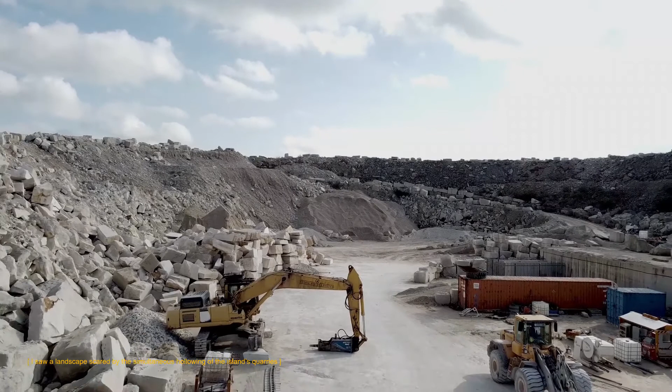On my visit to the Isle of Portland, I saw a landscape scarred by the simultaneous hollowing of the island's quarries and the layering of its offcuts. The scale of Portland's material absence is not comprehensible by the immediacy of the land around it, but only by way of recounting the limestone structures saturating the City of London.

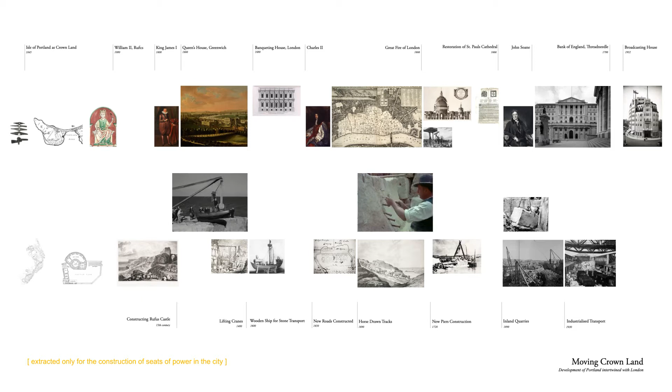Displaced for over 400 years, the island is one of the UK's largest sources of construction limestone, but the decline of solid limestone construction has replaced stone masonry with cement and cladding production that today accounts for more than 90% of the island's output. As a royal manor, the moving of royal land historically symbolized a transfer of authority, extracted only for the construction of seats of power in the city, governing religious, financial, and development priorities.

In the last century, the shift from sea-based to land-based transportation incentivized the pulverization of limestone into cement, requiring the grinding of 2 tons of limestone for every ton of cement, while breakages from the slicing of large dimension stone into thin, lightweight cladding produced 90% wastage during fabrication.

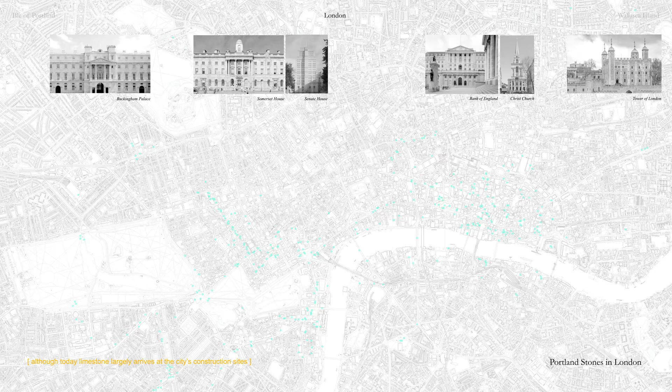Quarrying, the act of scoring natural stones, extracts terrains into unfinished cities, giving cities the illusion that Earth does not exist. This is a map of the square miles of remaining Portland stone buildings, although today limestone largely arrives at the city's construction sites in the form of concrete mixes.

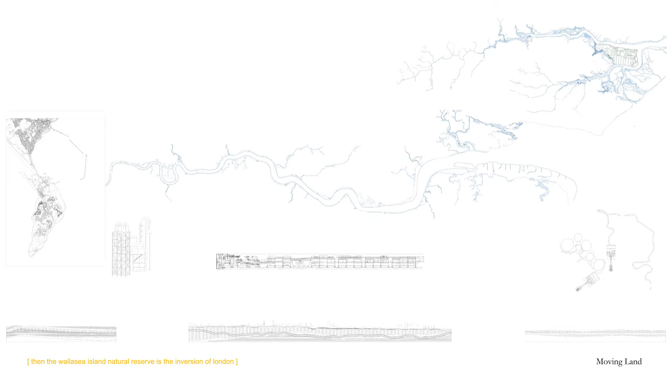If London is the inversion of Portland, then the Wallasea Island Natural Reserve is the inversion of London. The 269-hectare island, nested in the River Crouch Delta near the coast of Essex, is a reparation zone built to undo the destruction of urban construction.

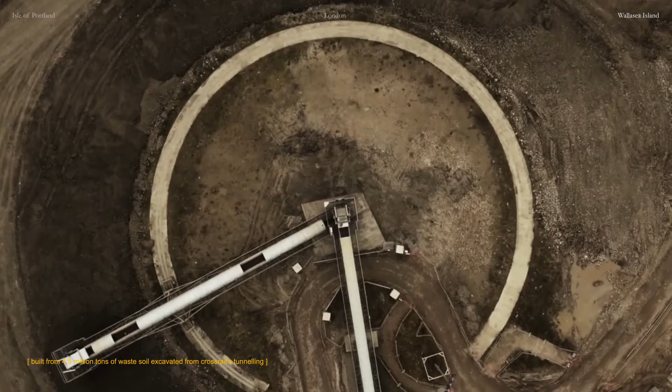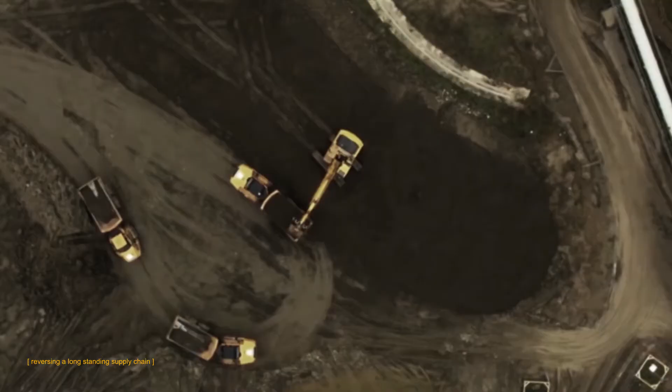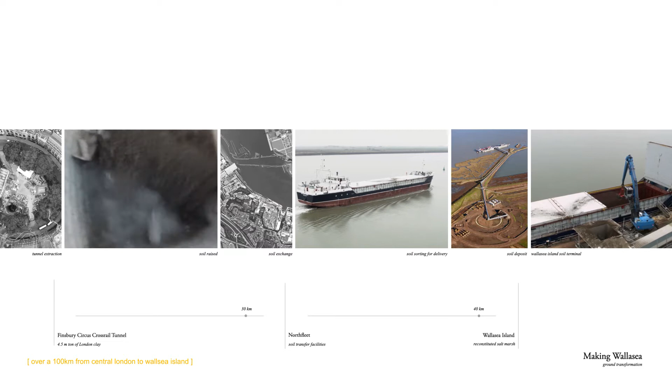Built from 4.5 million tons of waste soil excavated from Crossrail's tunneling, the construction of the island turns cities into sites of extraction for reparative landscapes, reversing a long-standing supply chain of urbanization by extraction through the creation of reparation zones. To rehabilitate a land twice the size of the City of London, more than 2,000 large boatloads of soil were shipped over 100 kilometers from central London to Wallasea Island.

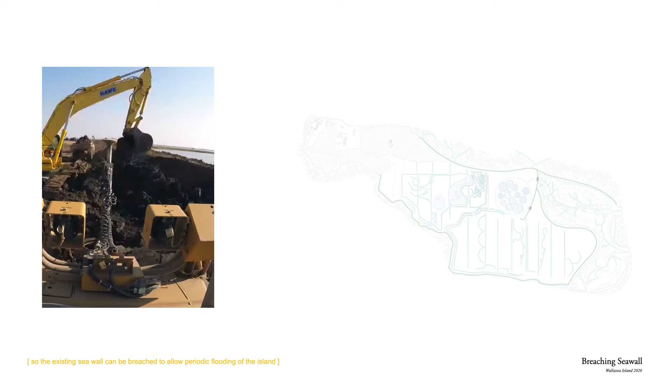The soil was used to raise the topography, originally sitting 2 meters below sea level, so the existing seawall can be breached to allow periodic flooding of the island, while tidal regulating dams and saline lagoons monitor the salinity of the island's soil and inland waterways.

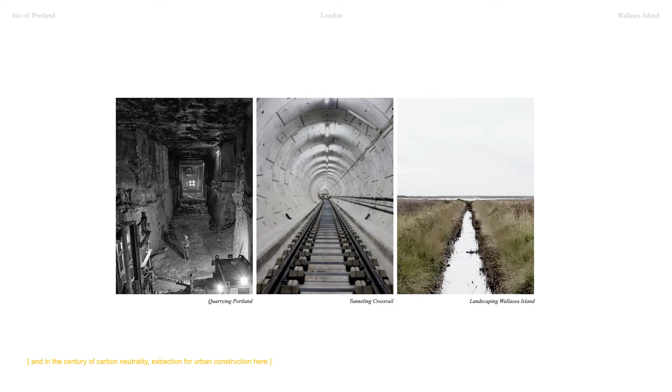Wallasea Island is the inversion of London, which in turn is the inversion of Portland. In the century of carbon neutrality, extraction for urban construction here should demand the building of reparation zones elsewhere.

Therefore, the construction of the institute itself should become part of the process of reparation, by challenging modern stone manufacturing, designing with large dimension stones in order to reduce waste and overall carbon emission.

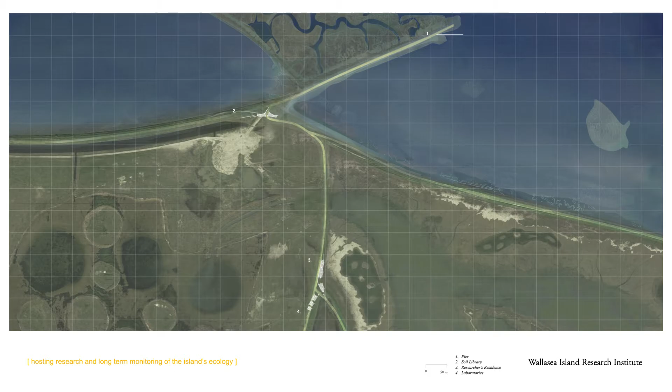The institute would extend the landscape into a sequence of limestone structures hosting research and long-term monitoring of the island's ecology, including a permanent residence for up to 30 researchers, a series of adjacent laboratories, and a soil library towards the north of the island for the long-term preservation of the island's soil, water, and vegetation samples.

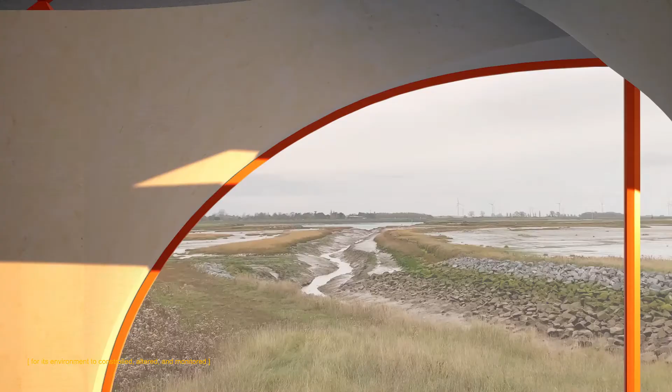Wallasea Island is not a naturally occurring wetland, but rather meticulously engineered and maintained by a network of urban machines. Its fragility and artificiality allowed for its environment to be controlled, altered, and monitored, providing an ideal testing ground to institutionalize the production of future ecological infrastructures and for the deployment of reparation zones everywhere.

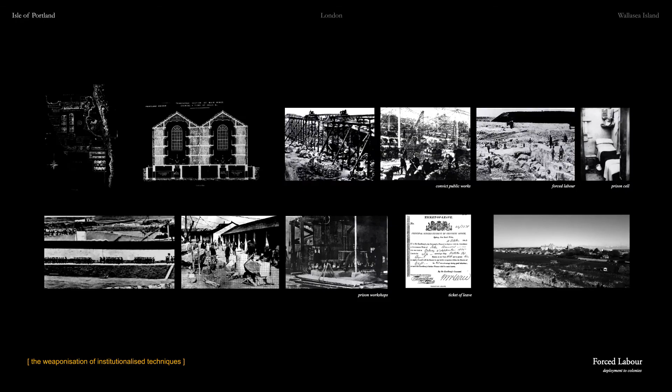The weaponization of institutionalized techniques takes lessons from the painful history of the Portland prison, where the Convict Public Works was founded in the 1850s to institutionalize the exploitation of prisoners into quarrymen, providing 10,000 tons of stones a week for the new Royal Navy base at Portland Harbor. The prison became an institute for the mass exportation of construction knowledge, as prisoners were sent to British colonies and forced to settle the New World with their acquired skills.

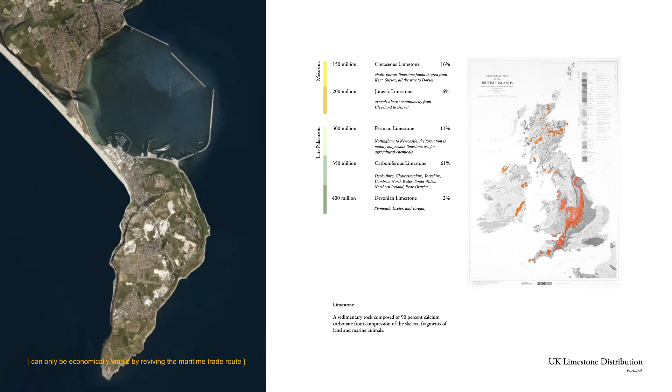The use of solid limestone construction can only be economically viable by reviving the maritime trade route that put Portland's stone industry at a geographical advantage to UK's inland limestone deposits 3 centuries ago. The act of shipping raw stones away from the city to Wallasea Island will signify a bifurcation of urbanization priorities towards the production of reparation zones.

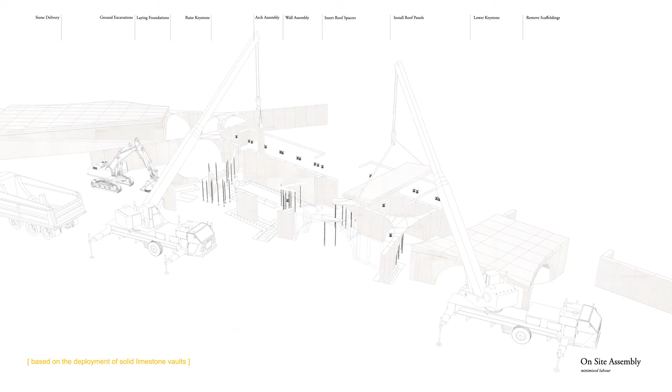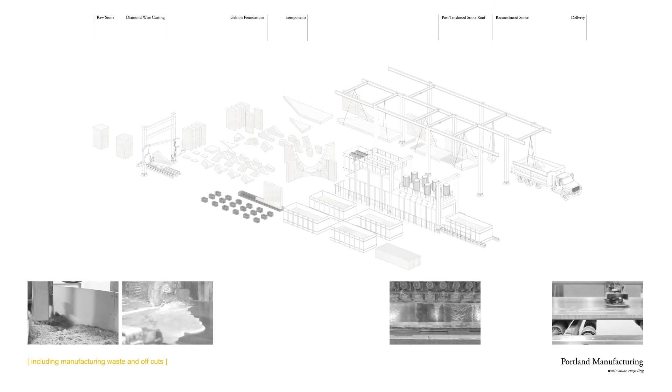The construction of the Research Institute is based on the deployment of prefabricated solid limestone vaults. In order to reduce supply chain complexity and disruption to the island's existing landscape, the majority of the building will be designed in Portland limestone, including manufacturing waste and offcuts that are reused as gabion foundations or reconstituted into engineered stone blocks. Most dimension stones in Portland are mined underground and processed with industrial diamond wire cutters, limiting the largest available stone to a block of 1.6 by 2.8 meters.

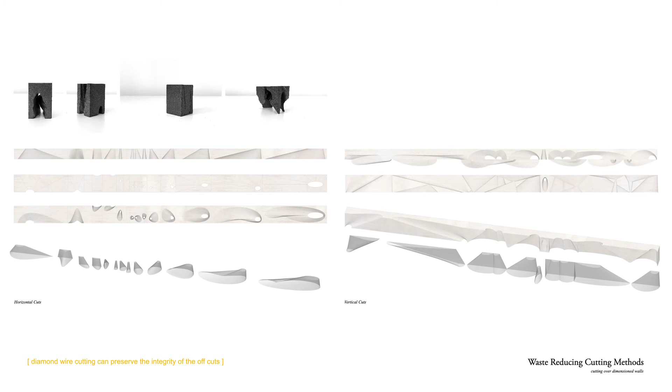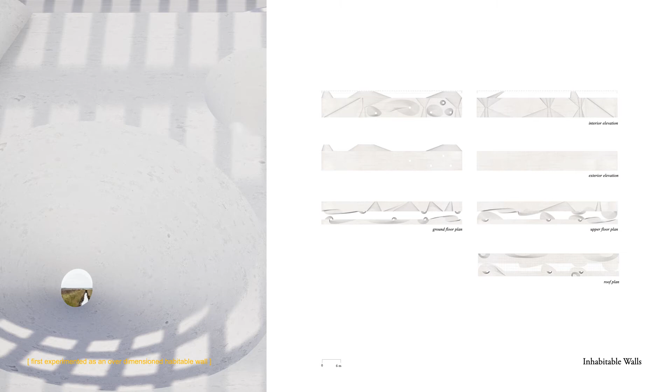Diamond wire cutting can preserve the integrity of the offcuts, making it possible for reuse or further cuts as explored in the early development of the tectonics. First experiment as an over-dimensioned habitable wall for landscape observation, where the offcuts can be flipped into columns to support a viewing platform atop the seawall.

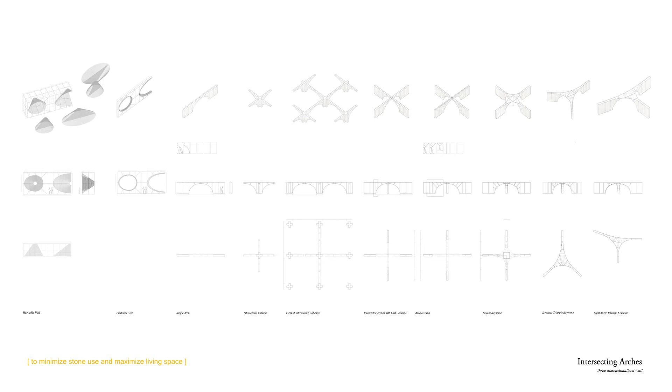To minimize stone use and maximize living space, the habitable wall was compressed into a series of arches and three-dimensionalized by forming intersections defined by a lost column. Therefore, the tectonic is not scalable in itself, but rather its spatial possibility lies in its multiplication.

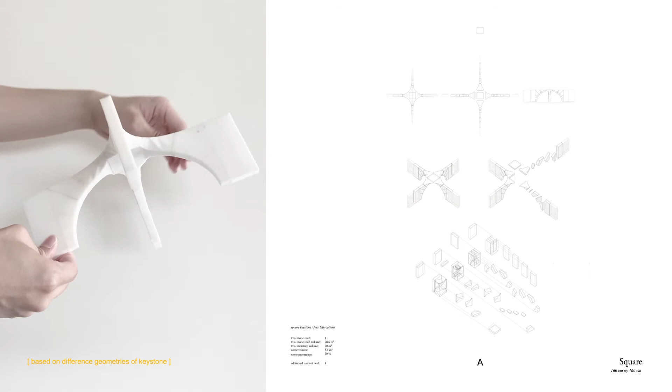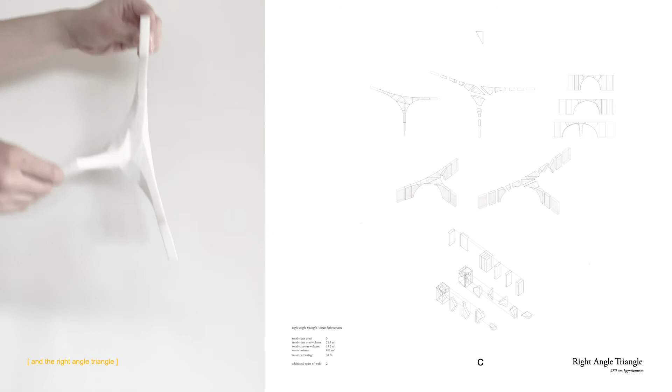3 types of intersections were developed based on different geometries of keystone. The result is a square that bifurcates a space equally in all 4 directions, an isosceles triangle that splits a single space into 2, and a right-angled triangle that combines tectonic A and B. The intersections become multi-directional transition spaces deployed to organize larger rooms beyond.

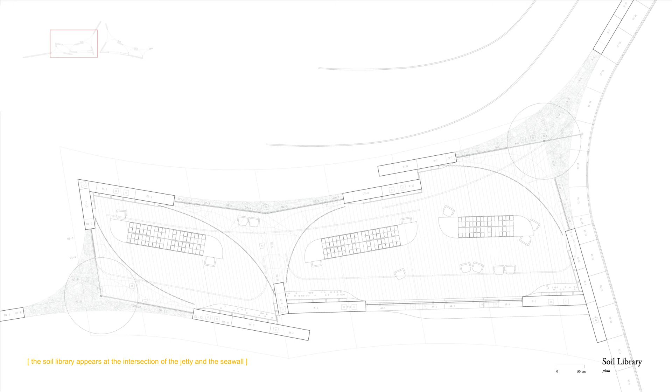As visitors walk towards the island, the soil library appears at the intersection of the jetty and the seawall, projecting from 2 sets of arches into an expanded horizontal view of the island, allowing for a moment of orientation upon arrival, while the reconstituted stone ramp provides public access to the roof.

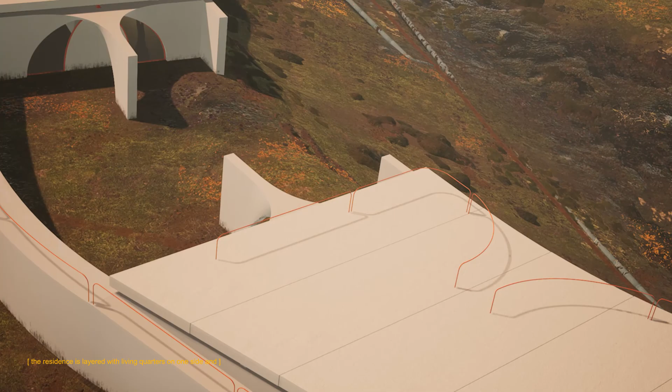Further along the footpath sits the researcher's residence, walled off entirely on one side to avoid the eyes of wandering visitors. The residence is layered with living quarters on one side and shared communal programs on the other. The rooms are partitioned by intersecting vaults dressed with thick curtains that can be drawn for larger gatherings, hosting educational workshops on the construction of miniaturized ecologies.

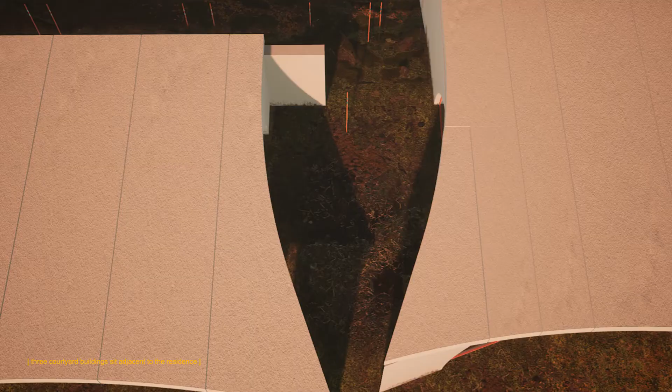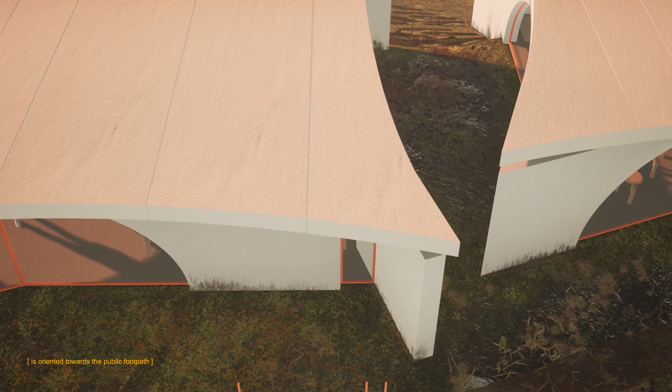3 courtyard buildings sit adjacent to the residence, facilitating indoor laboratories and semi-enclosed outdoor facilities for wetland fieldworks. Cut by a bifurcating seawall, the laboratories, in contrast to the residence, is oriented towards the public footpath, whereby the workings of the laboratory's front end is entirely open to public view, while the offices towards the back steps down by a meter following the existing slope, gaining greater privacy.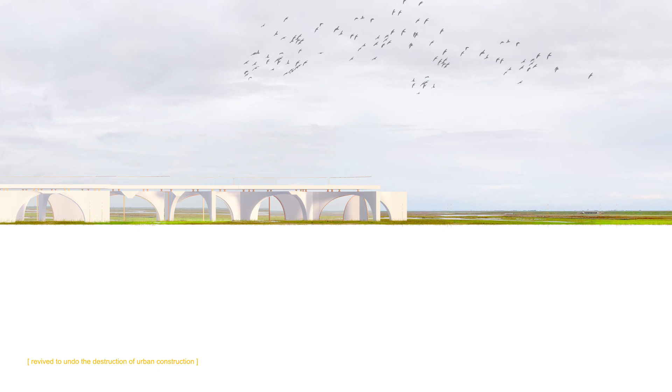From the library to the laboratory, the Wallasea Island Research Institute is a path that extends and raises the existing seawall into a landform building, built with displaced stone on an island of displaced land. Its construction is a monument to a renewed supply chain, revived to undo the destruction of urban construction, as all future construction should demand parallel reparations.

If cities and their monuments are inversions of quarries, the establishment of the Wallasea Island Research Institute will turn future cities into inversions of reparation zones.